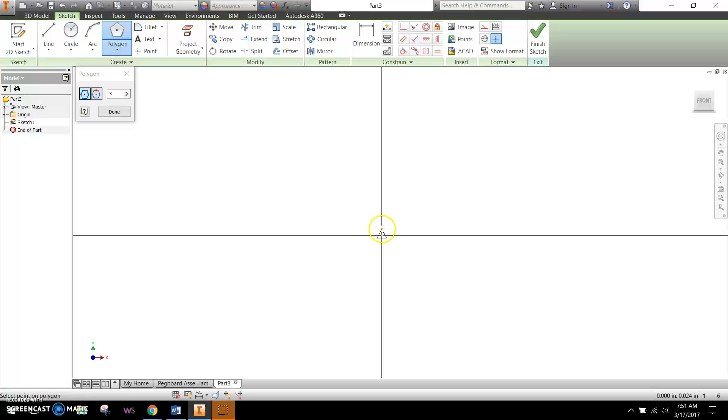We can't find the triangle underneath rectangle, so we're going to go down to polygon. Since it's a triangle, it will have 3 sides, just type in 3. Do not click done yet, otherwise you'll have to go through it again. Just click 3, and then we'll place a point somewhere on your page, and now you can see we can make a triangle. You can do this with any polygon, hexagons, heptagons, octagons, whatever.

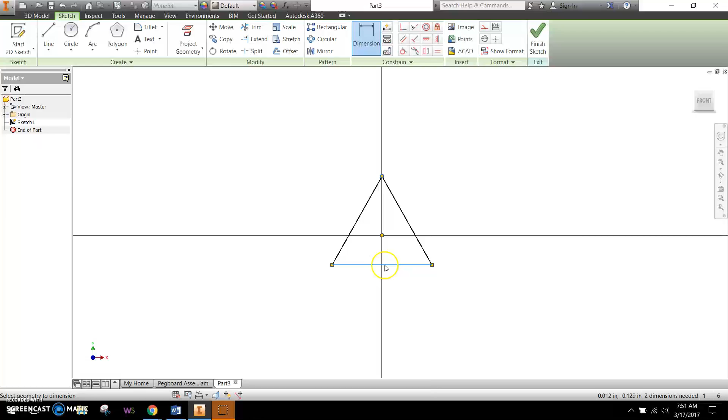So go ahead and make a triangle. We'll dimension it here in a second. Let's actually go to dimension and dimension it. We'll make it a 1-inch tall triangle. Click on the top of the triangle to the bottom of the triangle. This will give us a dimension, and we'll make it 1 inch. There's our 1-inch triangle. All right, we'll finish our sketch.

And we'll extrude this triangle 3 inches. And there's our 3-inch triangle peg.

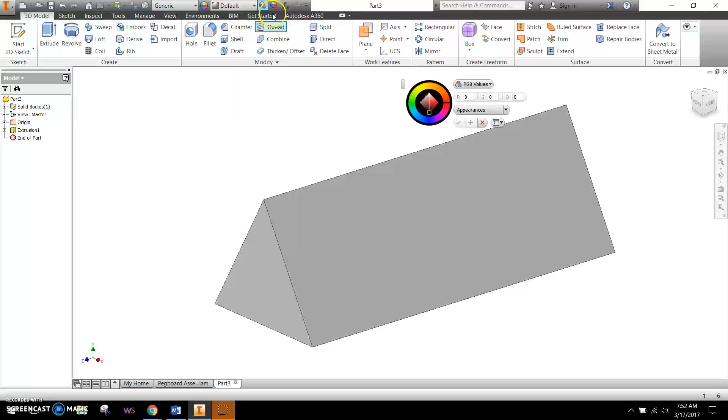So I'm going to go ahead and color this as well, make it blue like the rest of my parts. And then we'll save this as the triangle peg. I'll call it tri-peg.

Alright, so our triangle peg is complete. And then now we're going to work on our pegboard assembly, so we can put a triangle peg hole in there for the triangle peg. In order to do that, we're going to go ahead and open up our pegboard.

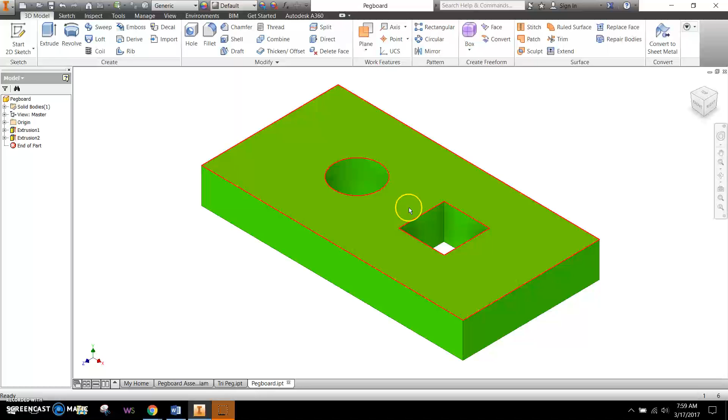And we're actually going to go ahead and edit our old sketch. So to edit this sketch with the circle and the square peg hole in it, we're going to go to Extrusion 2. We're going to right click and go to Edit Sketch.

So here's our sketch from before. I'm going to go ahead and delete these 2 constraints. Delete and delete. I'm just going to click on the edge of this to move it over a little bit, and the center of this to move it over the circle.

I'm going to draw another polygon with 3 sides for the triangle. I'll draw my triangle about right here. Click. And I'm going to make sure that this is horizontal down here, so a horizontal constraint for the bottom of this, just so it's nice and level.

And then we'll place our dimensions for the triangle. This should be a 1-inch high triangle. Let's make that 1 inch so it matches our triangle peg.

Alright, and now we need to center these all across the board. So, to center the circle, last time we did 5.75 divided by 3. This time we're going to have 1, 2, 3, 4 spaces, so we need to divide by 4. And that should get us right about there. Alright, so I played around with this triangle a little bit, and here's what we need to do with it.

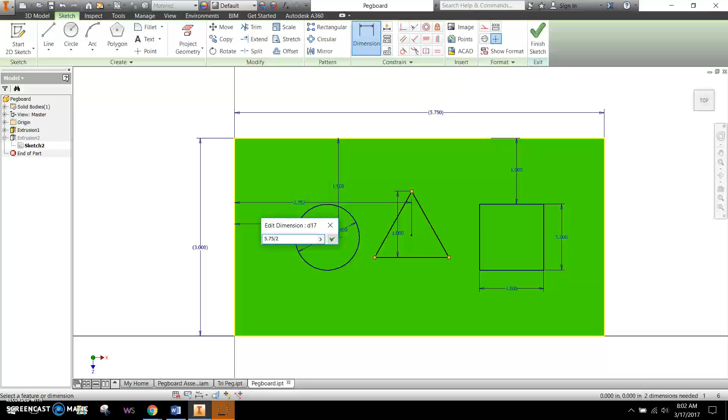Since it has a center point, all we need to do is go to Dimension, go from the left side to the center point, and this dimension is going to be half of 5.75. So 5.75 divided by 2 will get us right in the middle. Then for the square, we need to subtract the half inch again, so it'll be 5.75 divided by 4 minus our 0.5 for half of our square, to compensate for the center point. Alright, so now they're all centered horizontally.

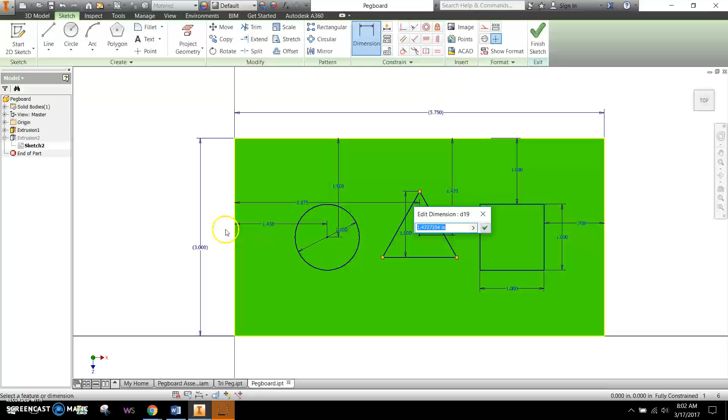Now the vertical part is going to get a little trickier for the triangle. If we dimension from the top to the bottom, we'll type in 3 divided by 2 and see what that gets us. That's pretty close, but it's still not quite in the center. It's still a little bit above the circle and the square, so it needs to come down a little bit more.

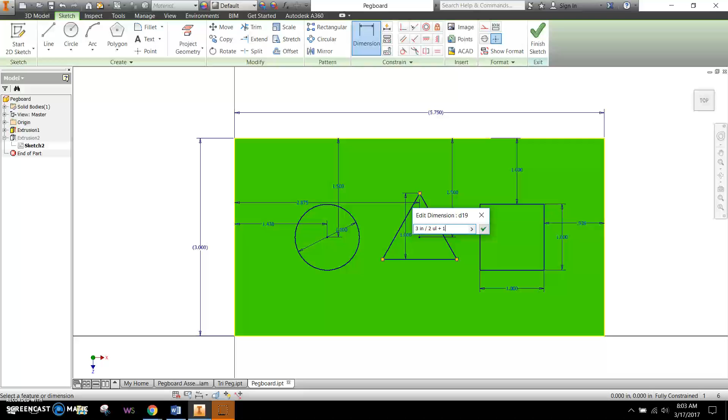So to edit a dimension, let's click on it, and we're going to add a third of the triangle and see how that goes. So 1 inch divided by 3, we'll see if that gets us where we need to be. Not quite. So instead of trying a third, let's try 1/6. And that is a lot closer - that's actually pretty spot on right there. Alright, we'll leave it at that.

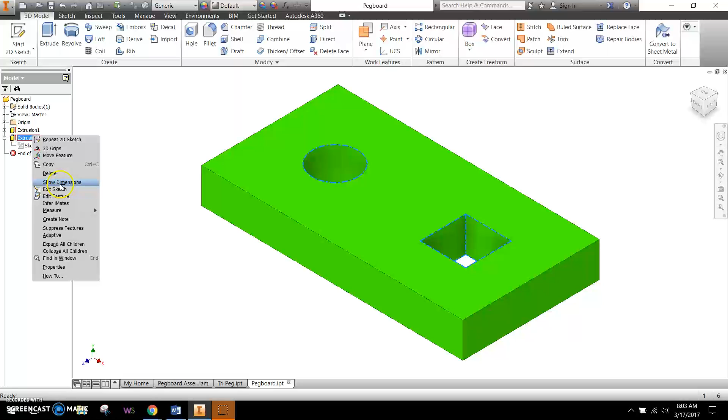Now if we finish our sketch, our two circles are spread apart a little bit more to make way for that triangle piece, but we can't see it. So to fix that, let's right-click Extrusion 2, the extrusion where our holes are, and go to Edit Feature instead of Sketch. This time we'll click on Profile to select another profile, and select that triangle in the middle to make our third hole, then press OK. And there's our third hole, our triangle hole.

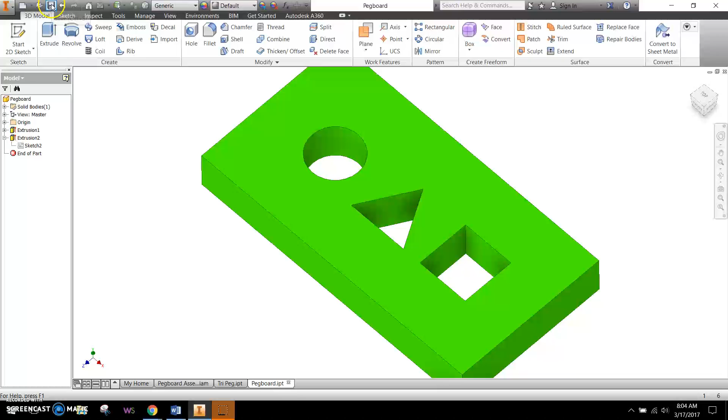So let's go ahead and save this pegboard and go back to our pegboard assembly. As you can see, our holes are made, but our assembly looks kind of funky - some of our pegs are not going in the right hole. So we should be able to click Update Assembly, or Local Update if I can find it. That's what we want - we want to update the assembly, so click on that. That'll spread them out, so the pegs are going in the right places now.

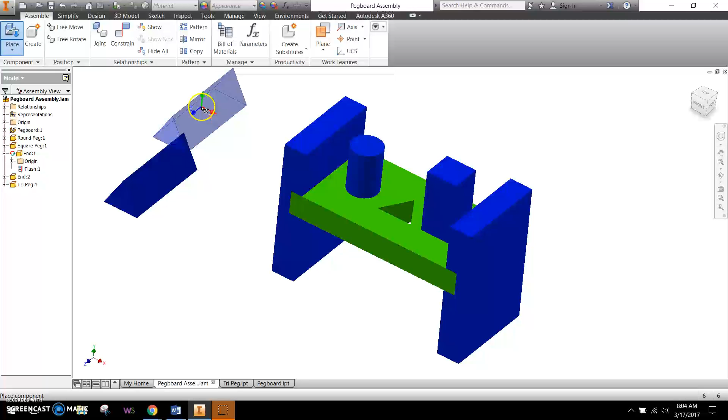So the last thing we want to do is go to Place, and we're going to place the triangle peg. Place that in there, press Escape, and then we're going to constrain this peg. To constrain this peg, we're going to constrain two parts, these two sides, to two sides of the peg. I'll go ahead and leave it at Mate, so Mate and Mate. I'm going to click this inside piece.

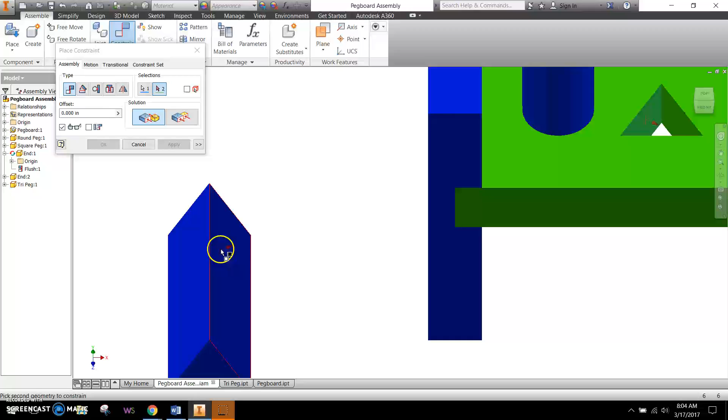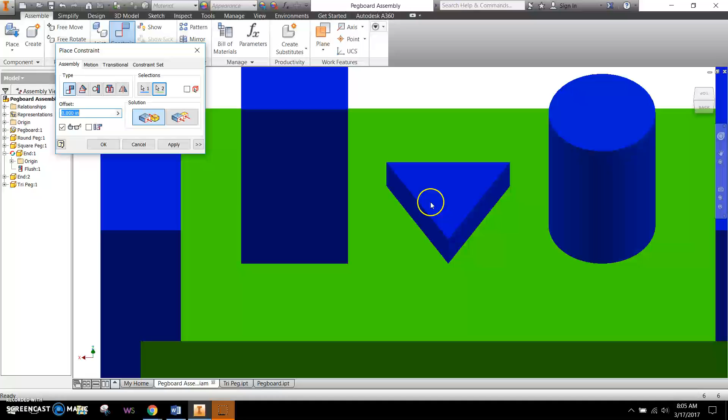Now I'm going to click one side of my triangle peg, just like that, and click Apply. The only other thing I need to do is click on one of the other faces, like this face, and I want this face to match up with this side. I'll do it this way - I want it to go around to that side of the hole. Then click Apply, and then we should be good.

So if we go back home, all of our pegs should freely move up and down. And we are all set. Alright, go ahead and click Save. And that's it for this episode. Good job!